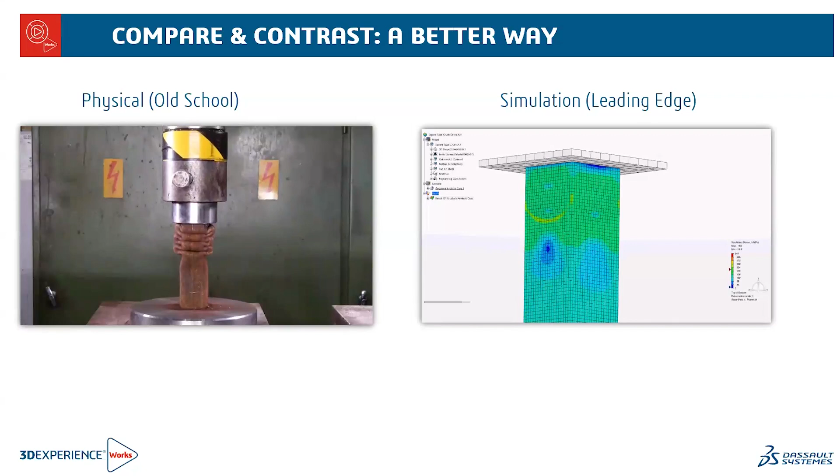Let's look here and compare and contrast the better way of designing products. So we are looking at a simulation example of the crushing of this metal tube. On the left we have the physical prototype, the old school way, and on the right we have the virtual prototype way using simulation, in this case structural simulation. As you can imagine, it would take a lot longer and be a lot more costly to set up and run the physical prototype, whereas you'll be able to save a lot of time and money by running the simulation, or using virtual prototype.

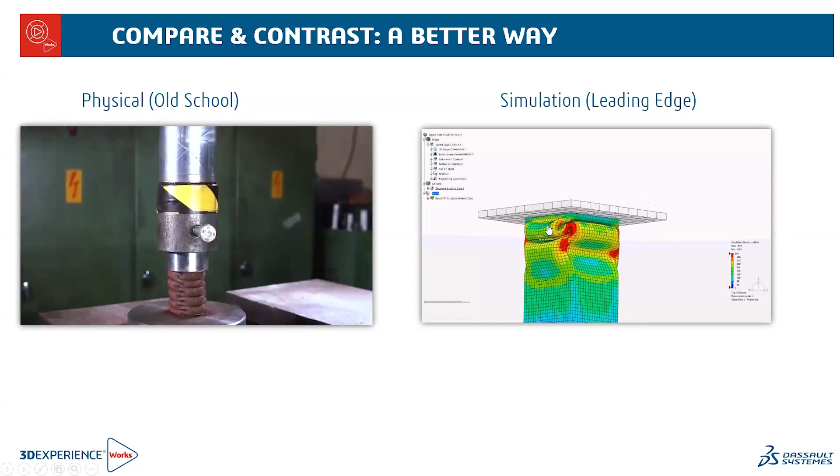So, using the leading edge way - why do companies use engineering simulation? The main reasons why companies use virtual prototyping are, first, to save time, so faster. Developing and testing physical prototypes takes time, and virtual prototyping can significantly speed up the development process, allowing you to get quicker iteration and allow you to bring product to market faster.

Then better - product quality, higher safety, reduce costly errors and failure risk. So with simulation, you can identify and address potential issues early in the design process.

And then cheaper, cost reduction. Building physical prototypes is expensive, and simulation allows you to test designs without the high costs associated with physical production and testing of these prototypes.

In addition to these three most obvious benefits, your company can benefit from design optimization, so engineers can test various scenarios and parameters to find the best possible design solutions.

You can start with a low-end product to simulate linear statics, frequency, buckling, and thermal, then move to linear dynamics, then use more advanced applications such as nonlinear statics, implicit dynamics, fatigue, complex materials, advanced meshing, and advanced contact.

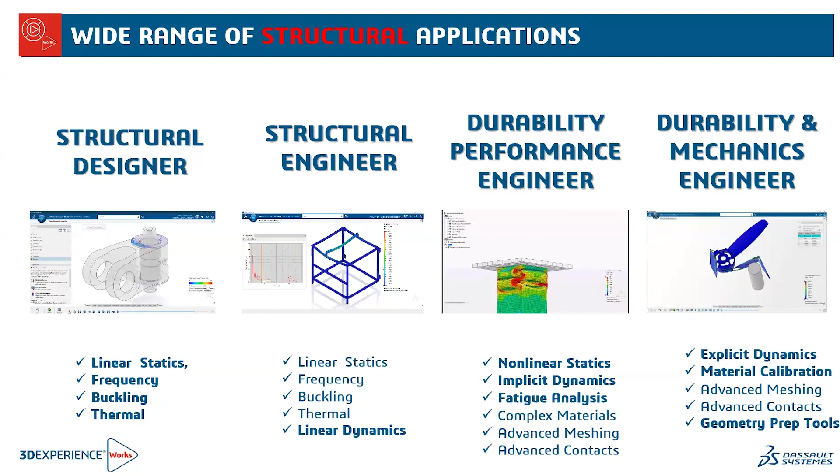And then go even higher to more advanced applications such as explicit dynamics, material calibration, advanced meshing, advanced contact, and geometry preparation tools. So these are the typical structural applications.

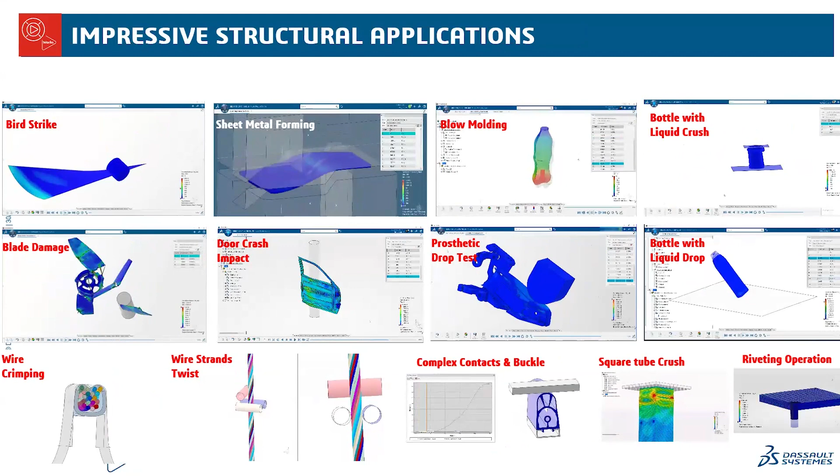Now let's look at some impressive applications which can be solved with the 3D Experience simulation structural tools. For those of you with experience with simulation, these are very complex and advanced applications that only a few software in the market can simulate.

You can see here, for example, a car door going through a crash or impact. Here, a blade damage, or a rigid object dropping on a prosthetic.

So structural simulation allows you to evaluate how your structure responds to external loads, so you can design better products. For example, you can make modifications such as increasing the thickness of components, changing the geometry, adding safety or strengthening features, and simulating them again to see if the design has been improved.

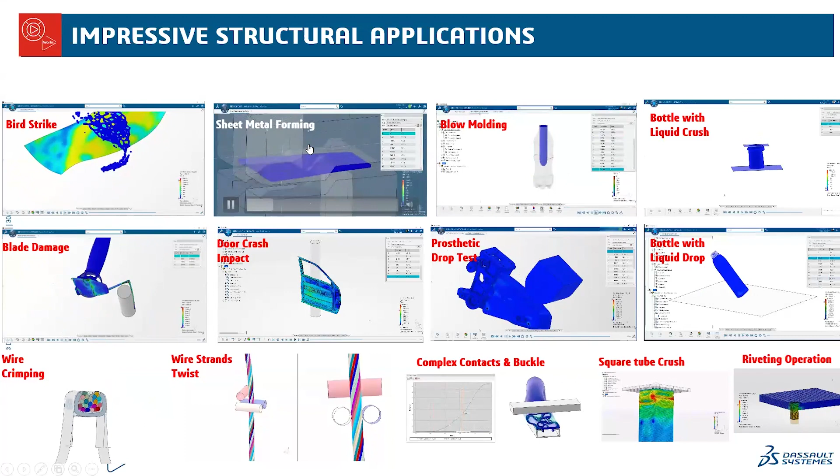So here you can see sheet metal forming applications, blow molding, or a drop test of a bottle with liquid. All of these applications are very powerful and very nonlinear, which is where 3D Experience simulation really shines.

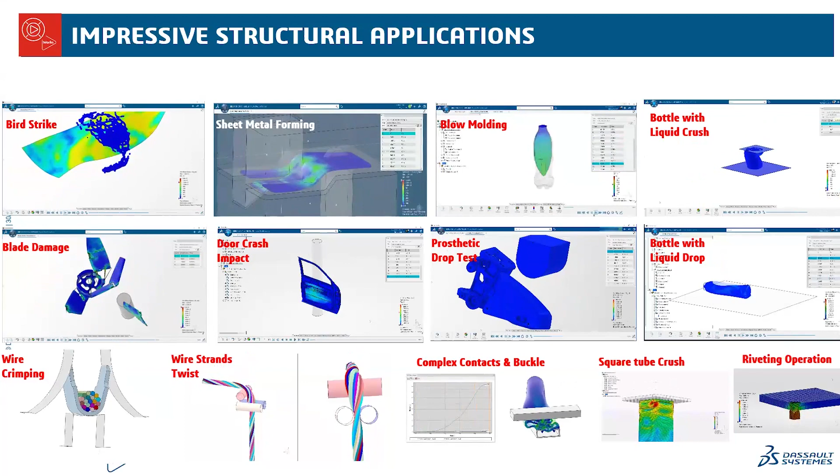For fluid applications, or computational fluid dynamics (CFD), it focuses on the behavior of fluids—liquids and gases—and their interaction. It is used to analyze things like aerodynamics, hydrodynamics, and thermal management.

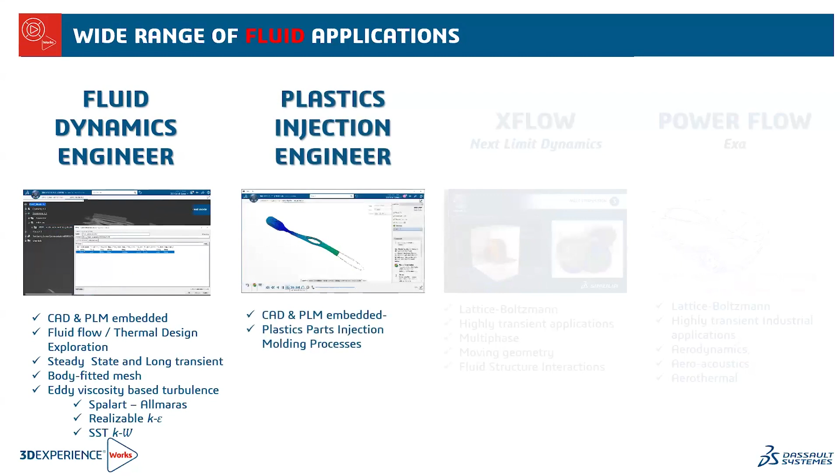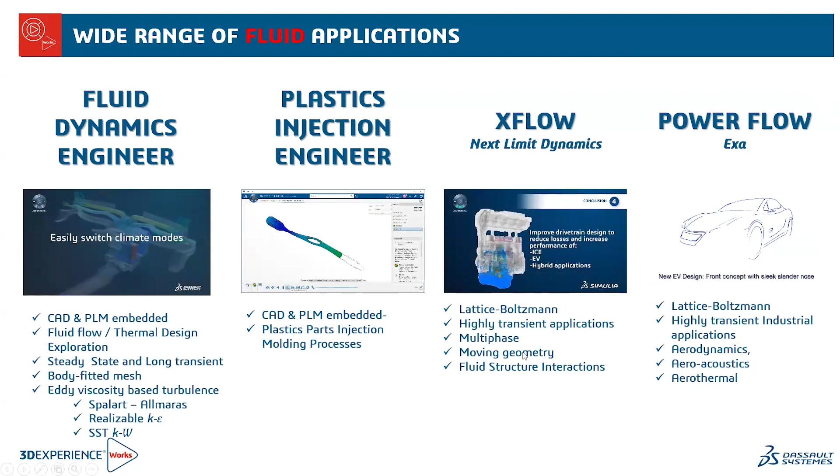3D Experience simulation offers the Navier-Stokes method for fluid flow and thermal exploration, injection molding tools for injection molding components, and two lattice Boltzmann products for highly transient, multi-phase, or moving geometry applications—more advanced use cases.

For electromagnetic simulation, which analyzes the behavior of electromagnetic fields, commonly used in the design of antennas, sensors, and electronic devices, 3D Experience simulation offers world-class CST technology, which covers the full range of frequencies, from low to high. Low frequency electromagnetics covers sensors, magnet design, and electric motors and generators.

High frequency electromagnetics covers antenna design and microwave component design. For electronics, it covers signal integrity, power integrity, electromagnetic compatibility, electromagnetic interference, and electronic cooling.

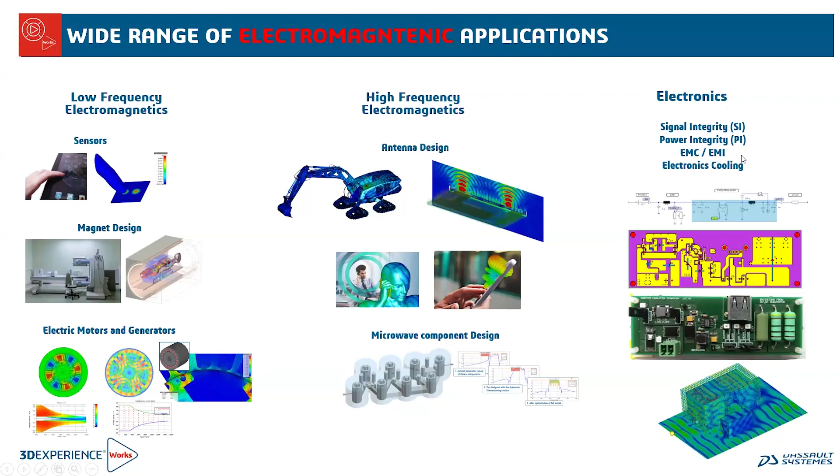Industry considerations: is the simulation tool suitable for your industries? Well, 3D Experience simulation is suitable for an extensive range of industry applications.

In industrial equipment, for example, you can do structural integrity of equipment to ensure safety and durability of your components on the structural side, or electromagnetic field analysis to simulate magnetic fields in equipment such as motors. In high-tech, drop test is a typical application, used to assist in the design of circuits, electromagnetic compatibility, and thermal management of electronic components.

Then in life science, you can virtually test safety of medical devices such as stents, implants, and prosthetics. Then you have transportation and mobility, so crash simulation, aerodynamics, engine performance, and thermal management.

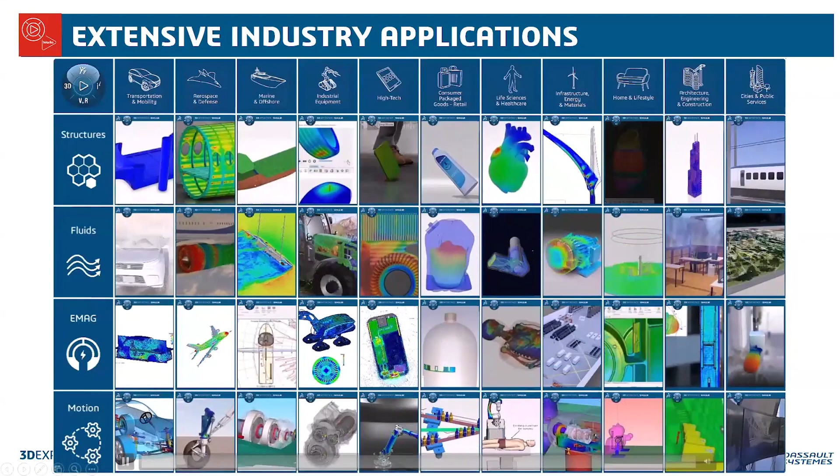Note that I didn't have time to talk about motion or multi-body dynamics, which provide analysis of movement and interaction of interconnected bodies. So you'll be able to simulate kinematic, dynamic interaction and collision detections, shown here in the application at the very bottom of this page.

Now, an important consideration when selecting a simulation tool is accuracy and reliability. The technology behind 3D Experience simulation is the best simulation tool from Dassault Systèmes. On the structural side, that is, of course, Abaqus, which has been around since the 1970s. Abaqus sets the standard for finite element analysis and offers the best nonlinear solver and technology on the marketplace.

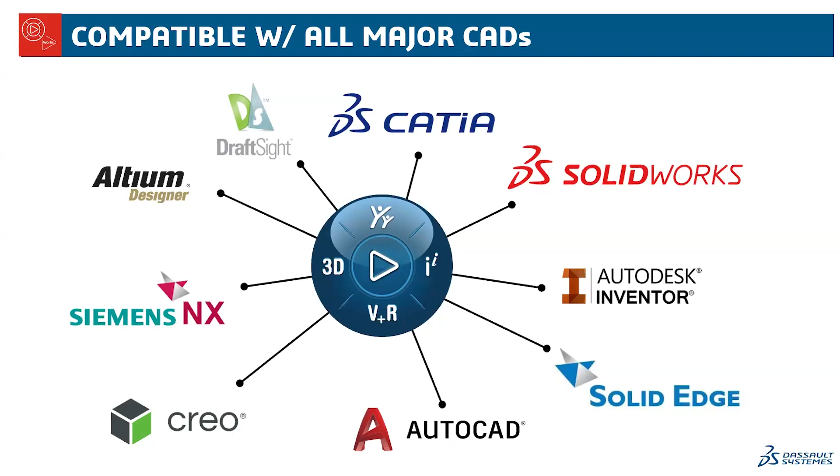Now, the next consideration is the performance and scalability of the simulation tool. Can the simulation tool handle large and complex simulations? Or do you need to invest in computers or even servers?

Well, a great benefit from 3D Experience simulation is you can solve your large and complex simulations on the cloud very fast, so no need to buy computers or servers or to maintain them or keep them up to date. Instead of solving on your local machine, you can obtain your simulation results a lot faster with cloud computing, using Dassault Systèmes servers, which are powerful and constantly kept up to date. Note that most of our 3D Experience simulation products come with 8 cores or some with 16 cores.

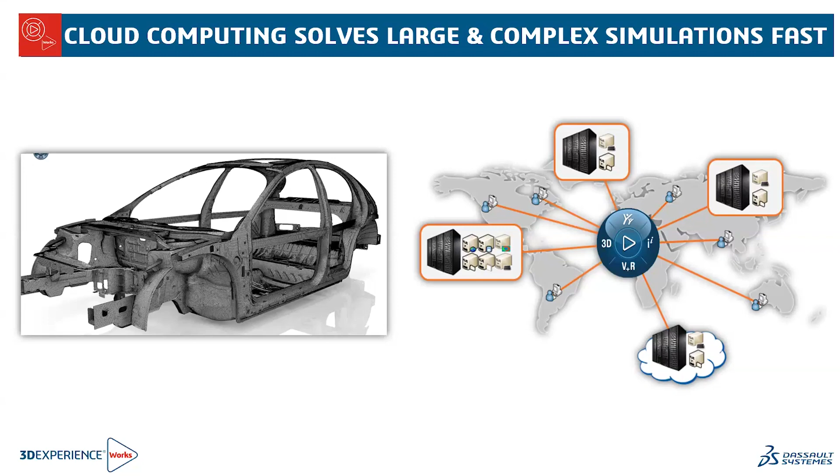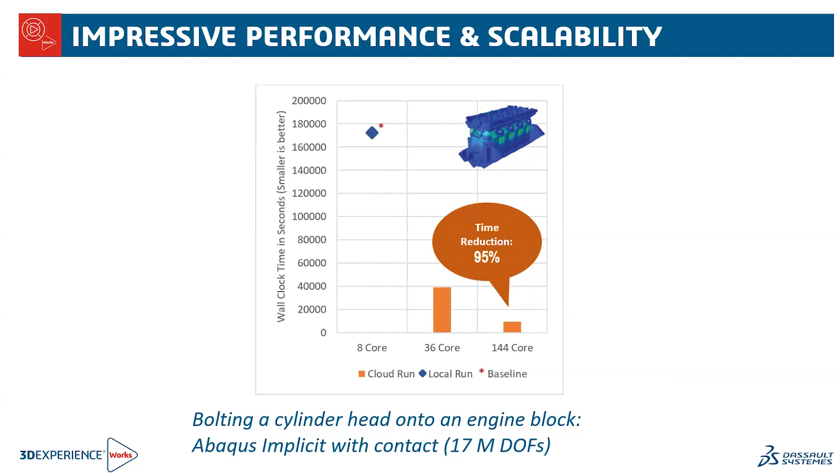The second example is an explicit study of a frontal car crash with 29 million degrees of freedom. With 144 cores, we got a time reduction of 91% compared to the same study run locally with 18 cores. So these two examples are just to show you the impressive performance and scalability of the 3D Experience structure simulation tool.

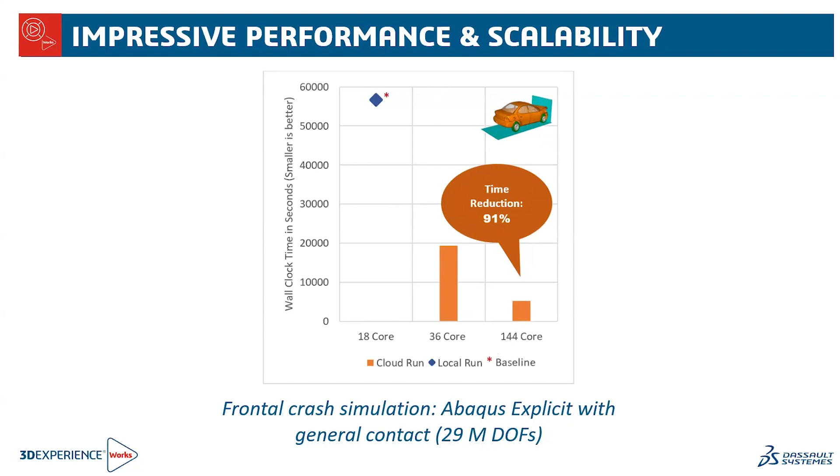Now, the next consideration is usability and support of the simulation tool. Ease of use is a critical factor for the adoption and success of the software, as well as product training. So we're going to talk about the guided assistant, the online training, and the embedded tutorial.

The guided assistant guides the user step by step. It shows you what you need to do to carry out a successful simulation. The green check mark means that the step is completed, giving you confidence to move forward and successfully complete your simulation. This guided assistant improves the ease of use and increases the productivity of the software.

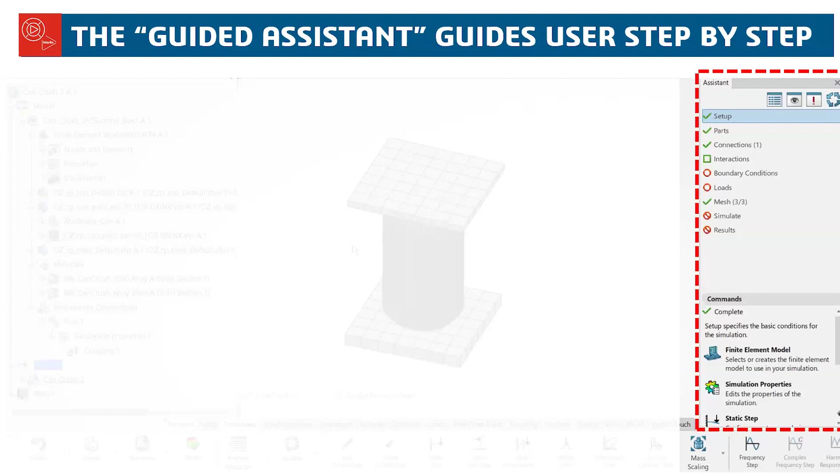This guided assistant is common to all of our simulation tools. So you can go from structural to fluid to electromagnetic using a similar assistant—a very familiar assistant that will help you step by step through each of your studies.

In addition to this online training, our resellers, such as DMD, offer custom training for your specific application, so you'll be successful more quickly with your specific simulation or virtual prototyping cases.

In addition, you will also find embedded tutorials for a large number of analyses. Here you can see them for structures, fluids, electromagnetics, but also design exploration and optimization, and material calibration. These embedded tutorials facilitate training and expedite your learning curve.

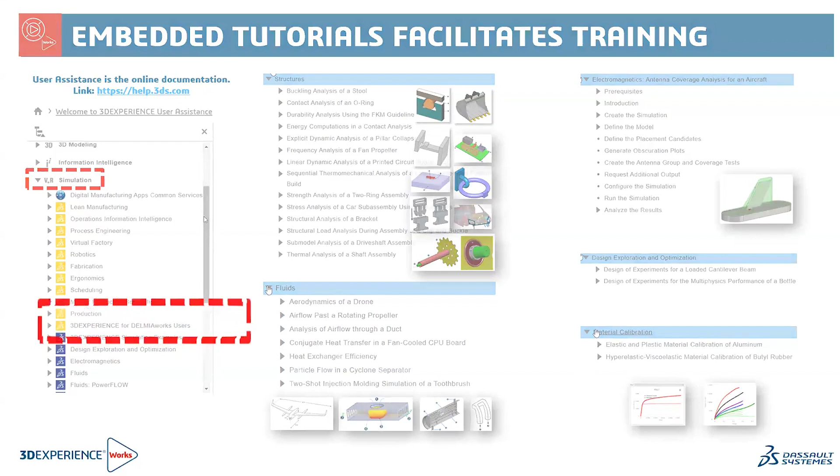So support: you will benefit from deep expertise and layers of support. When using 3D Experience simulation, your first line of support will be our value-added resellers—in this case, DMD. You will work with application engineers who are certified with Dassault Systèmes simulation products every year.

On the second line of support, you will work with Dassault Systèmes SolidWorks technical support team, and at SolidWorks we have a team of experts. Thirdly, you can work with Simulia experts who have deep industry expertise and decades of simulation experience.

So the next consideration is the reputation and stability of simulation vendors. For over 40 years, Dassault Systèmes is recognized as the global leader in computer engineering due to our comprehensive suite of advanced simulation tools and extensive industry expertise. We are now a $6.5 billion company and among the Fortune 500 largest software companies.

A quick note about software costs: we offer flexible purchasing models where you can lease our simulation software yearly or even quarterly to just get started. So the initial investment is low, and there are no upfront costs, even with cloud computing.

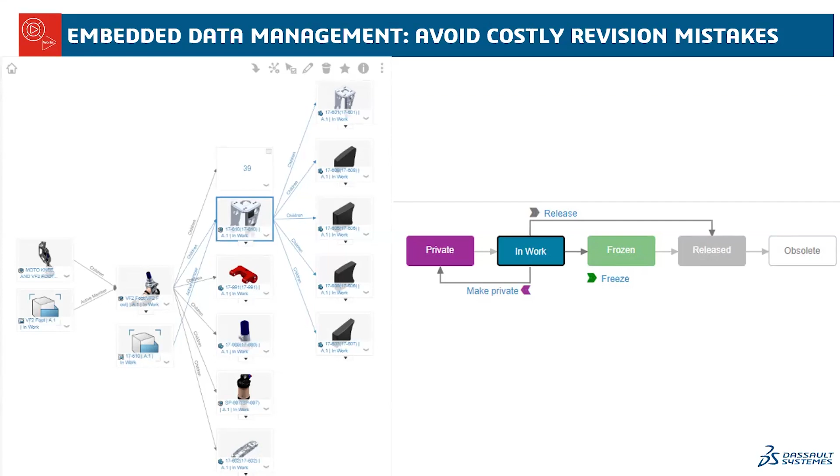The last benefit I'd like to discuss is collaboration and flexibility to work from anywhere, from your home office, for example. The 3D Experience platform is a virtual and interdisciplinary place where everyone can work together, regardless of their responsibility, system, or geographic location.

Historically, you would have the design, engineering, simulation, and manufacturing teams working together. But now, with the 3D Experience platform, you can collaborate with teams such as sales, marketing, finance, purchasing, methods, and industrial design. So the 3D Experience platform enables team collaboration.

It allows you to collaborate with your colleagues who work in different domains from anywhere in the world, facilitating collaboration among team members. As a result, the 3D Experience platform gives you the flexibility to really work from your home, from your vacation home—a lake house or ski house—wherever you want to be.

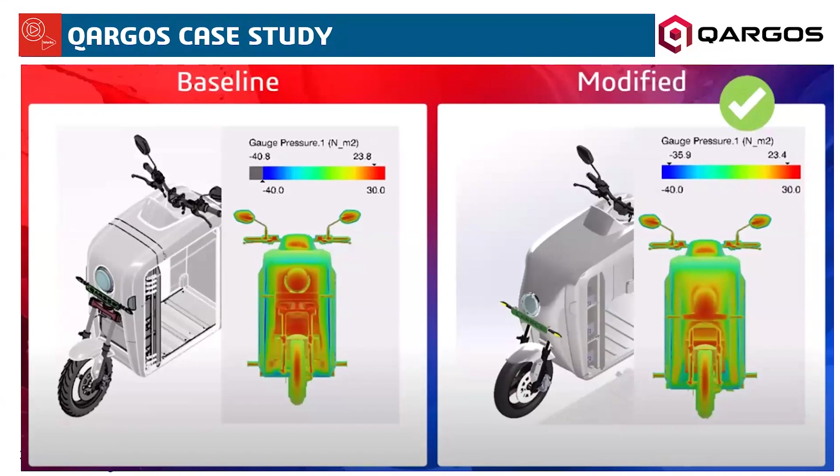Let's have a look at 3 case studies. The first is Qargos, a company from India developing a 2-wheel electric e-bike, as you can see here. Qargos utilizes almost all of our 3D Experience simulation tools available to SolidWorks customers—structural, fluid, electromagnetic, plastics, and motion tools.

As a result, Qargos was able to bring product to market faster. They are not building any physical prototypes at all. All they do is use our simulation tools to resolve all of their engineering issues, and this is amazing because they were able to save a lot of time and bring product to market a lot faster.

They were able to make better products to enhance their product quality. In this case, they reduced vehicle weight by 30%, saving material and increasing vehicle efficiency. They were able to optimize vehicle aerodynamics by reducing rider fatigue due to drag forces, enhance battery thermal management to improve efficiency, safety, and range, and maximize the size of the cargo compartment, increasing payload capacity.

And cheaper - they were able to reduce the number of prototypes. Actually, they didn't build any prototypes at all. So they brought the simulation benefit to the extreme here, saving a ton of money by not building costly physical prototypes.

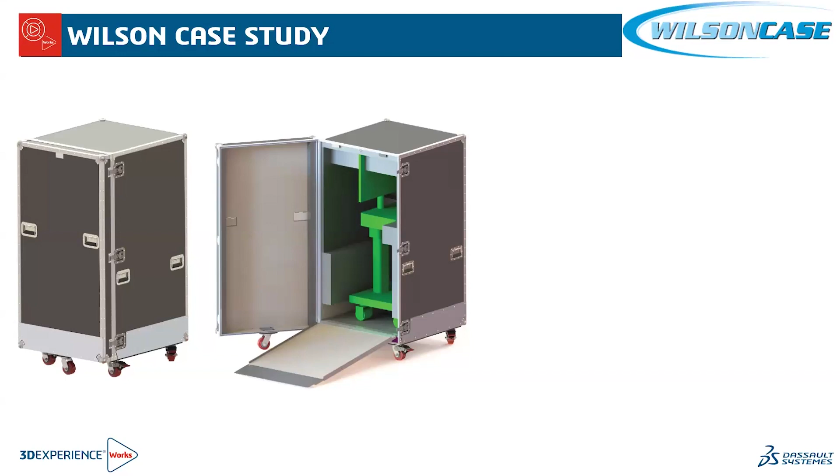The next case study is a company based in Nebraska called Wilson Case, who develops custom protective shipping cases. They adopted 3D structural simulation to run advanced simulations, such as the drop test. By adopting 3D simulation, Wilson Case was able to shorten their design cycle via virtual prototyping.

They improved their product performance and reduced physical prototyping and material costs. For Wilson Case, in addition to the main common benefits, they were able to establish additional revenue by generating simulation-driven development services for their customers.

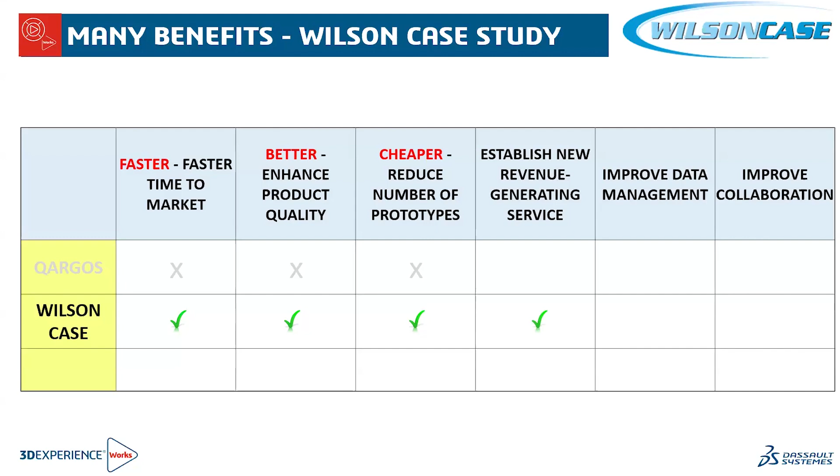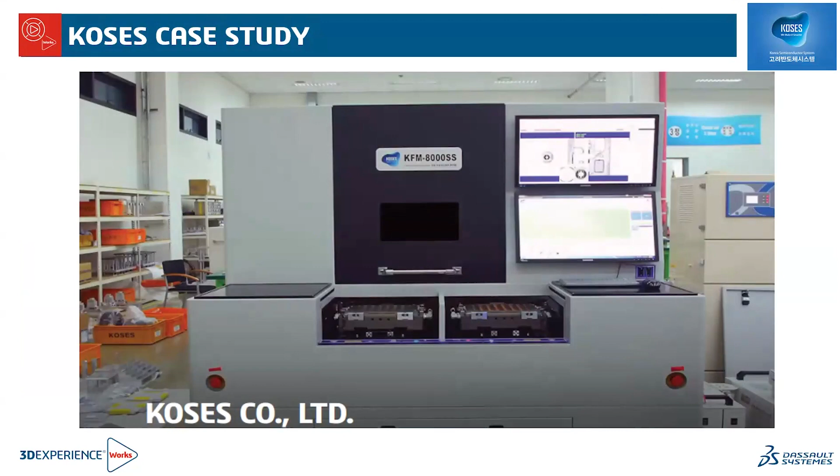The third and last case study is a Korean semiconductor company named KOSES, who makes semiconductor equipment. KOSES adopted 3D structural simulation to run their vibration analysis, and they were able to shorten their product development cycle by 20%, enhance product quality, and reduce the number of prototyping costs by 30%.

What is really interesting here is that, in addition to the three common benefits of simulation, they used the 3D platform, which enabled KOSES to improve data management by decreasing defects related to revision errors by 20%, and they were able to improve collaboration and communication between team members.

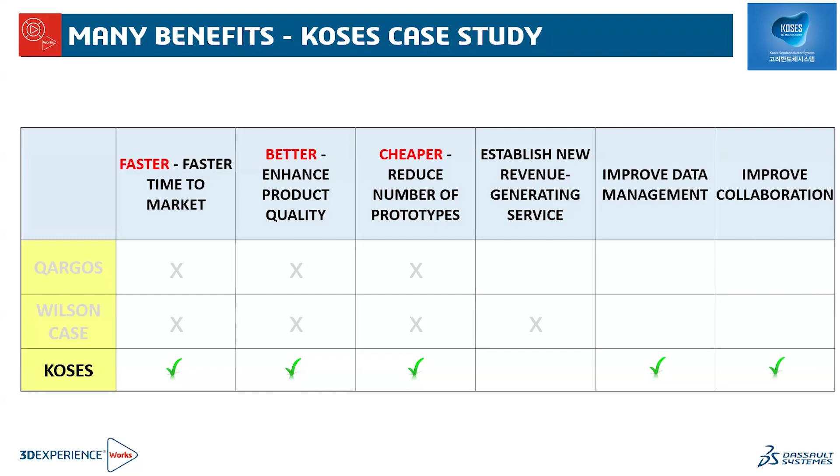In summary, I would say it's a no-brainer that simulation enables you to increase profit: faster time to market, better product quality, cheaper product by reducing the number of physical prototypes, and you don't need to be an expert to benefit from simulation.

Simulation makes you more competitive. So ask yourself, what percentage of your peer groups have adopted simulation? If a lot, then you are behind the curve. And if little, you could be the leader in your field by adopting simulation or by using better simulation tools than your competitors.